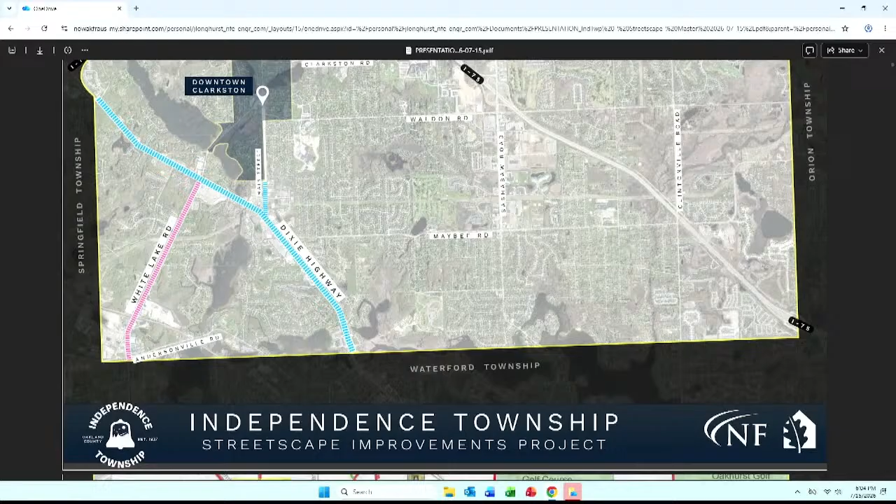So what we noticed is that in these focal points and corridors we're really looking at, White Lake, Dixie Highway, and Main Street, there are existing portions of concrete, some asphalt, but mostly concrete sidewalk that qualify today as safety paths. They're 8 feet wide, concrete from edge to edge, with clearance on either side. Where the areas are thick with this dashed blue and dashed pink, those areas do not have a safety path, whether there's no sidewalk at all, or there may be a 6 foot or 5 foot sidewalk that just doesn't qualify anymore as being safe for multiple users going both ways.

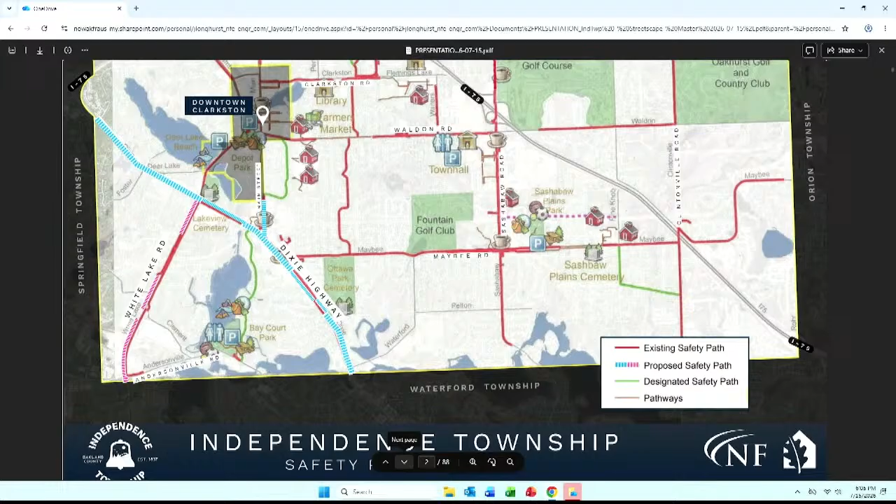We are from Nowak and Fraus. Chris is from Carlisle and Wortman Associates, and we're teaming together as an engineering, landscape architecture, and planning team to assist with this project.

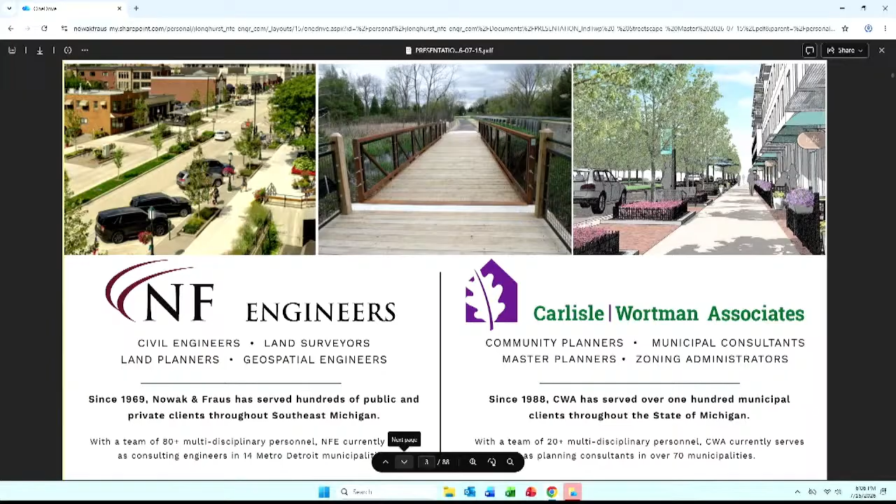Tonight we'll be presenting some strategies and standards for streetscape design and safety paths for pedestrian safety. We'll discuss each of the corridors separately, highlight some safety concerns we see today, and identify opportunities and constraints. Hopefully with feedback from everyone, we can set forward some future planning to push this into the next phase.

I'll let Chris talk about some streetscape design standards, but there are 4 elements we're looking at: hardscape, lighting, furnishing, and landscaping.

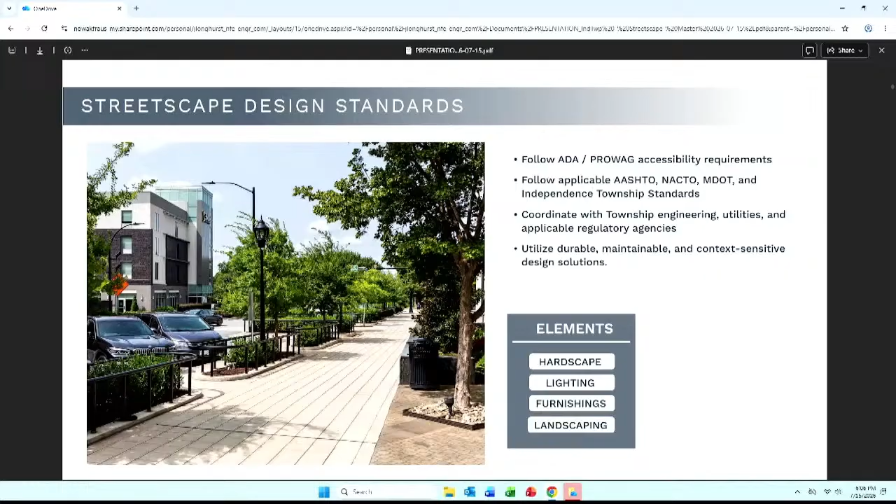One of the goals we have with this entire project is to really tie the corridor together. It's one thing to have a safety path, but it's another thing to have it become an amenity that defines the appearance and appeal of the corridor, and provides recreation and resting opportunities, encouraging people to get out and bike and walk more.

So we looked at those 4 elements, as Mark just said. I'm not going to go through these things in detail, I just want to give you a quick overview of what we're thinking about.

When you think about pavement, having a consistent width, texture, and appearance of the walk is going to be really critical. When we did the pocket park design, brushed concrete was the form that rose to the top, but there are a lot of other options too.

When you think about those crosswalks and how you might use that to differentiate the district from elsewhere in the township, there are a lot of options. One I've gotten kind of excited about recently is stamped asphalt with thermoplastic coating over the top. It gives the appearance of pavers without all the maintenance of pavers.

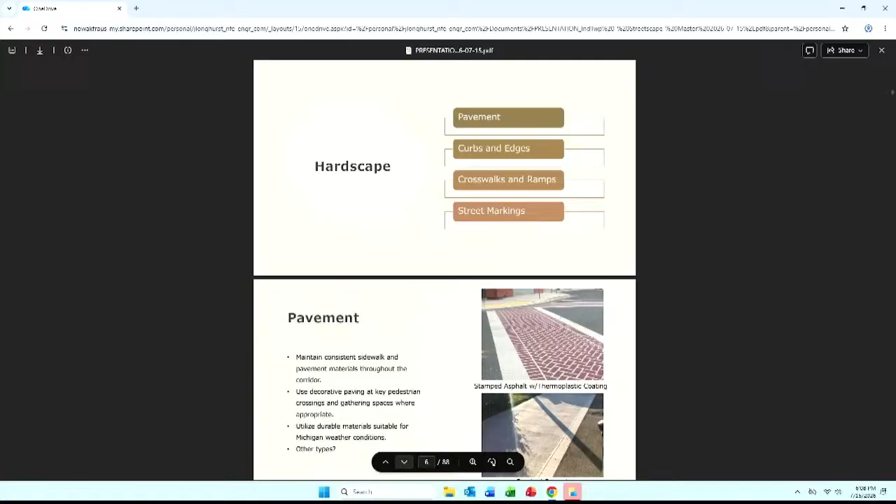As you've probably seen on the highway right now, the existing pavers are kind of lifting up in a lot of spots. This, theoretically at least, solves that problem. So the real point is to make sure we use durable materials that are consistent with Michigan weather.

Similarly, curbs and edges - how do you define what you want between the safety path itself and the side of the road? There are stretches of the highway where you've got grass right now and it's working beautifully, but there are other spots where it's going to get narrower and that grass may struggle. So do we want to figure out something different for that area?

Some places have ground cover in place, like creeping thyme, that might work. We're showing grasses and perennials. I think that would be in a very limited capacity where you've got adequate room between the path and the road, so you're not having any vision issues. There are a lot of options with that.

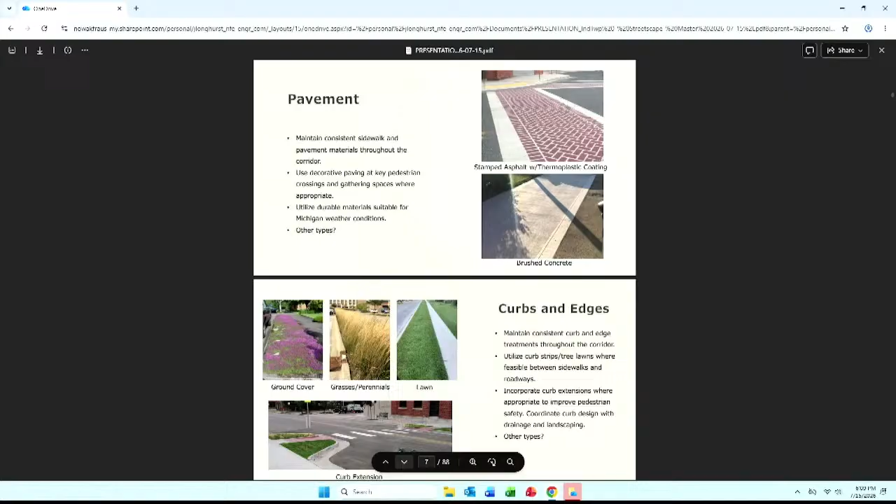One of the other things shown here is a curb extension. So on certain roads where you want to limit the distance that pedestrians and cyclists have to cross, that might be an option we can consider.

Crosswalks and ramps - you're going to hear a lot about ADA compliance from Nowak and Fraus, but high visibility crosswalk markings I think is going to be really critical.

Right now, all up and down the highway, where there are crosswalks they're few and far between, and it's 2 single white lines. Whereas if you had what they call zebra stripes - there are a number of different names, but that's the one I've latched on to - that's a high visibility marking that makes it evident somebody might be crossing there, pay attention. It tends to slow drivers down, makes it a lot safer for everybody involved.

As we think about mid-block crossings, right now you've got 2 stretches of road that go for over a mile with no crossings at all. So what happens? The cars just start flying - I'm sure we've all experienced that. It's already marked as a 55-mile-an-hour road, but if you had some kind of crossing in the middle with appropriate lighting and safety markings, that would slow things down a bit more, make the corridor more pleasant, and make it safer for everybody involved.

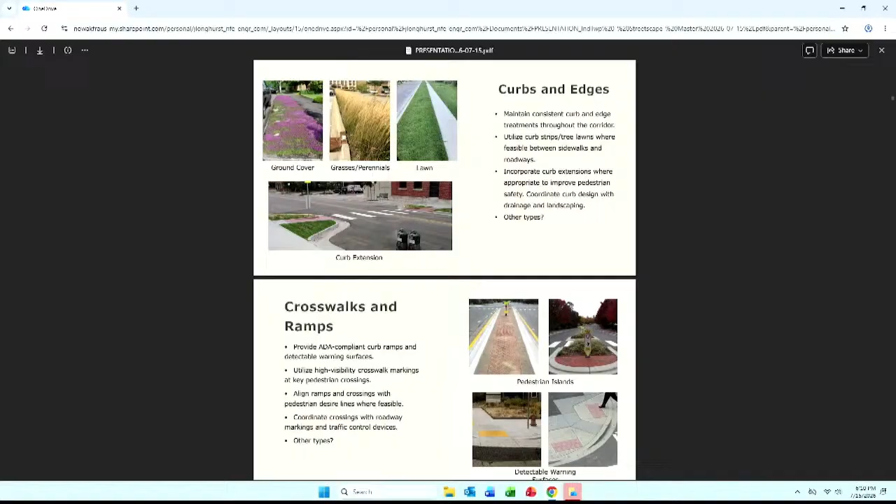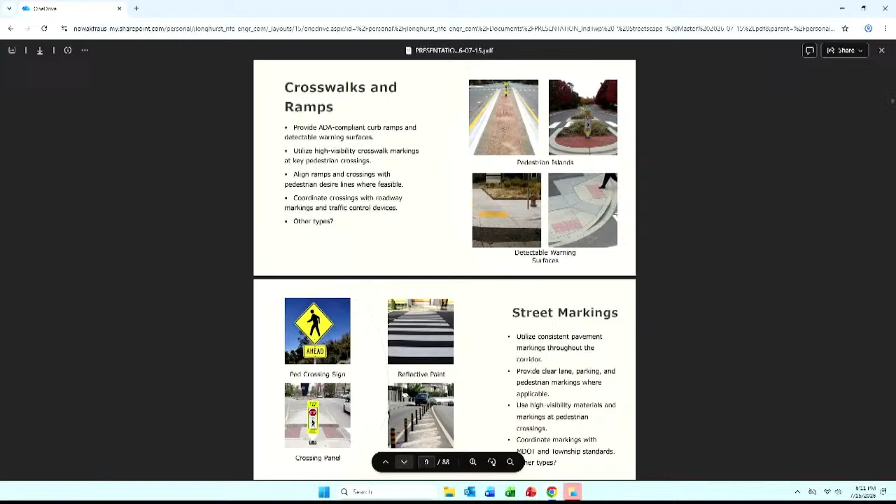I already touched a little bit on street markings. There might be opportunities for bollards, although I think that's going to be a pretty rare occasion. Using crossing panels may be an opportunity too. Certainly pedestrian crossing signs are going to be a big deal, especially if we get into putting in mid-block crossings.

So what Carla has been focusing on so far is the idea of respites. By respites, we're looking at maybe not a full-on pocket park like we're proposing for Gateway Park, but just a little area where you might have a bench, some shade, somewhere to sit and relax for a minute as you're walking along the corridor. It doesn't have to be elaborate, but if you've got room and can make something a little bit more special, that may be an opportunity too. We'll talk some more about some different options for that.

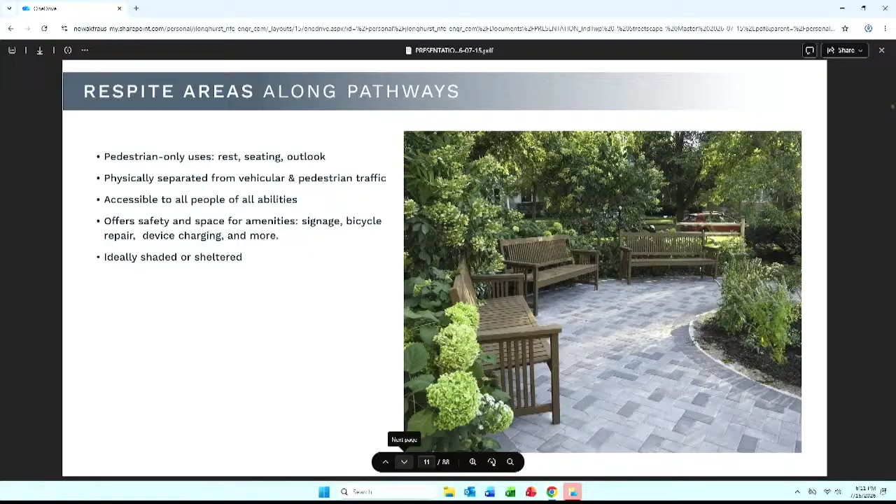So this is Clarkston Dix Plaza Park. I'm sure you're all familiar with it. It's a really good example of what a larger respite space might look like. It's as simple as having a few benches, some nice landscaping, an interesting walkway, and it really sets off the front of the building behind it, becoming a nice amenity. Now with this one, unfortunately there's only one crosswalk leading to it, so there may be an opportunity to improve that pedestrian flow too.

I think I'm going to turn shared use pathways over to Mark. Sure, I know some of you were here for our shared use pathway presentation a few months ago, but it's a good time to incorporate this into the entire streetscape design. There's already a really nice network of 8-foot wide pathways through the township. This slide explains what they're for: they're multi-use, accessible and available to everybody, whether they're on wheels or not, whether they have mobility issues or not. They also provide connectivity between homes and recreation areas, and are mobility avenues for people to get from businesses to schools to parks, all of the above.

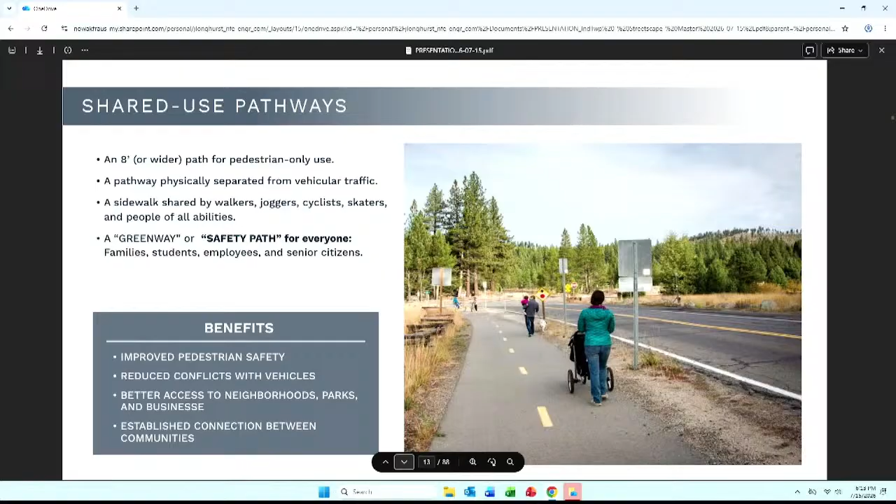These are some examples in the township of recent projects.

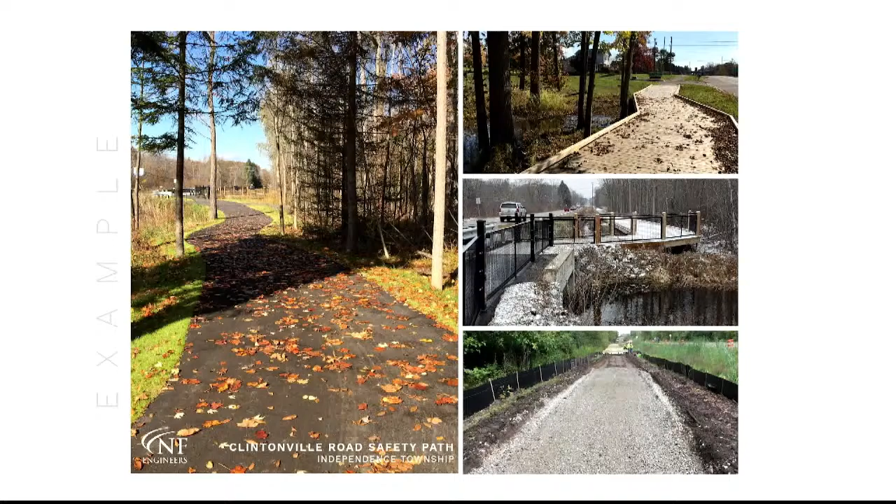You got it. I also think we do need to look to the future more so than existing ones. I see a lot of these put into place to cover areas like crosswalks, and they're totally abused - they don't mean anything to these drivers. Dixie Highway is a very fast-paced, moving, no-room-for-adjustment type of area, and when they're explaining how they're qualifying and what they're used for, I think we as a board need to look at futuristic ideas more so than what's currently existing.

So many of these you see on Telegraph already, in Pontiac between Huron Road and Square Lake Road - they've used those crosswalks, and more people get in trouble there than they help. They don't slow down the traffic. That's exactly what we're gonna run into on Dixie Highway. They're used in so many places, people have tried them, trial and error, and I just don't see it being realistic for our use.

We had a subcommittee meeting - it was me, Sam, and Gus - and we talked about maybe the need for adding one crosswalk, because there's no crosswalk between, say, Andersonville. If anywhere, we'd probably put one at the bottom of the hill, close to Gus's liquor store. I guess there's apartments over there, so people.

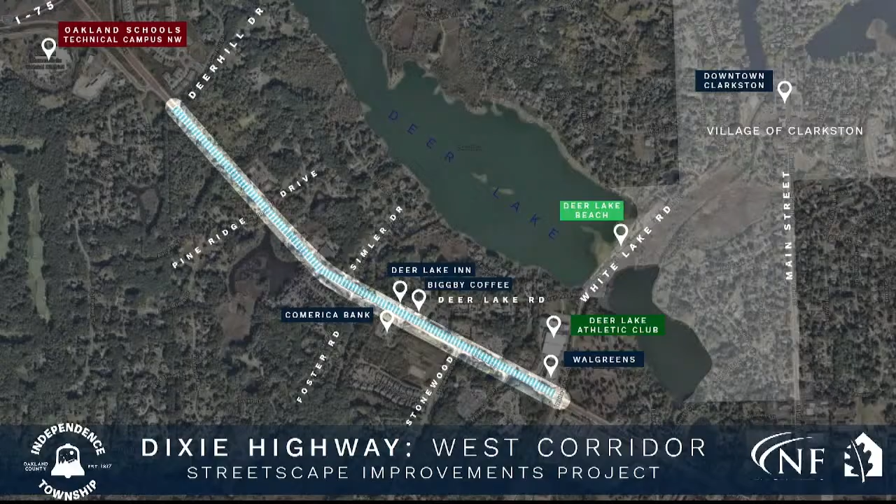Here's a couple of landmarks for those who frequent the area or don't. We've got Oakland Schools Technical Campus at the northwest end, Walgreens at the White Lake intersection, the Deer Lake Athletic Club, which leads to White Lake Road and into downtown Clarkston. We'll go through these relatively quickly.

So how do we connect to that? How do we work with it? Those are questions we're thinking of. We have safety concerns along the shoulders - this whole stretch of Dixie Highway has large widths of sidewalk, but they weren't really intended to be sidewalk. They're raised shoulders for maybe emergency use. People are walking on them though, and it's a 55-mile-per-hour road.

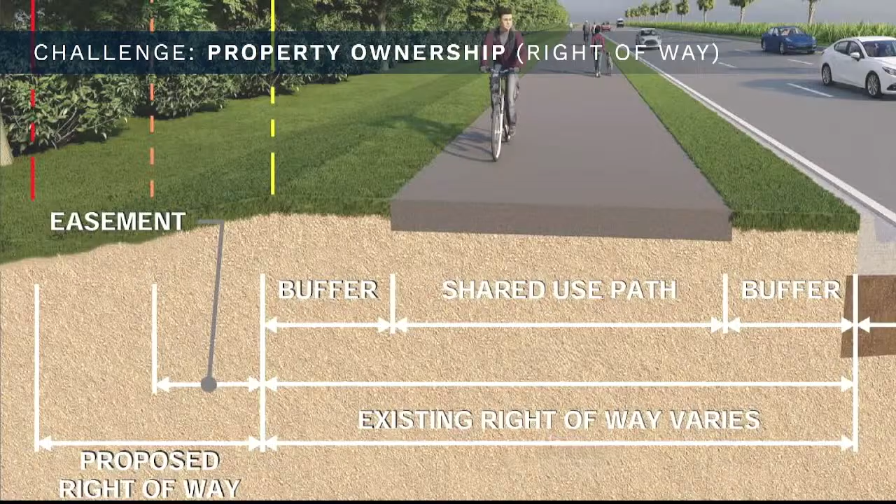These don't qualify as safety paths. What would you have to do to those to get them to qualify as a safety path? We'll get into that as we go. We need an 8-foot-wide pathway, whether it's asphalt, wood, concrete - even crushed stone would qualify.

But we need a buffer space as well. Usually, in our case, we're looking at 2 feet on either side, so that someone riding on the edge with a bike with handles has clearance from utility poles, trees, branches, brush, anything that could possibly be in the way, including railings on a boardwalk. The boardwalks are typically a little bit wider to accommodate movement and people passing by at maybe a relatively greater speed than walking.

We also need to look at easements between this 12-foot minimum width of an area. Do we provide an easement so that there's ample room for the city or the township to work in that area if it's needed?

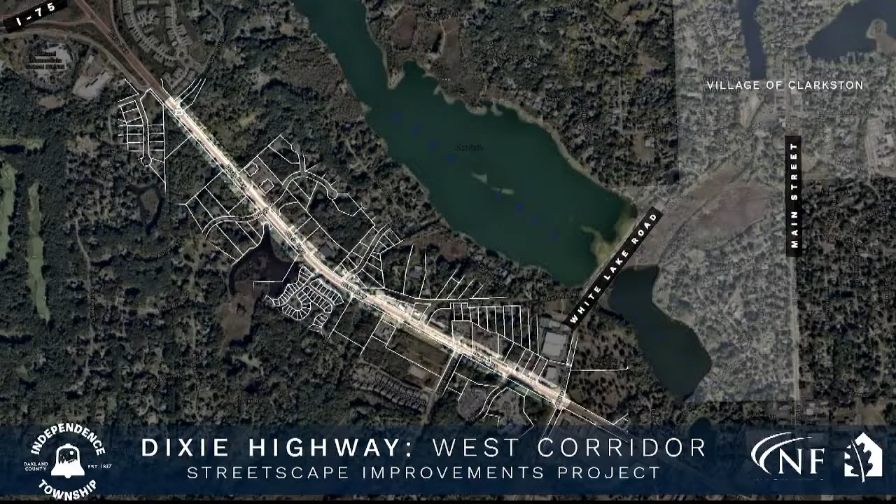Looking at the bottom left, the proposed right-of-way sometimes interferes with all of these things, so it varies. You'll see that here, especially in this stretch. The white lines are property lines, and a lot of them are running straight through the middle of the highway. So they're probably pretty old, deeded a long time ago.

And so it's a 120-foot width of right-of-way through the whole stretch, but in some areas it's about 66 feet. So to put a safety path along the northern edge of Dixie Highway here, we would need to adjust or acquire easements or propose easements, which would all come at a cost.

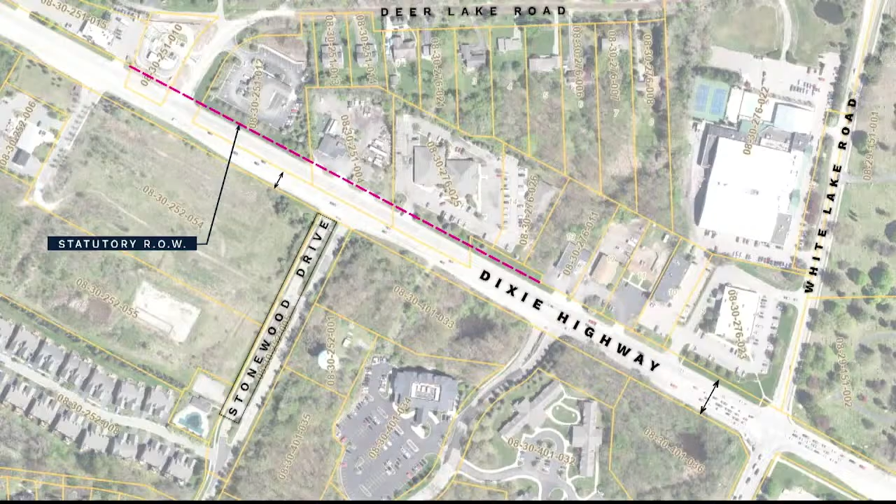If you get an easement for a property, do you require the property owner to address the trees, or is it something we would address as the DDA? Because if you go back, take this stretch from Stonewood to White Lake, that stretch of very heavily wooded area that you need to acquire, is that on the DDA to then deal with the trees and trim that down? Do you guys have any comment on that?

That's a function of the construction of the pathway. So you're just buying the easement and then we deal with it, right? We're not requiring them to do anything? Homeowners would not be responsible for anything maintenance-wise within the width of the easement.

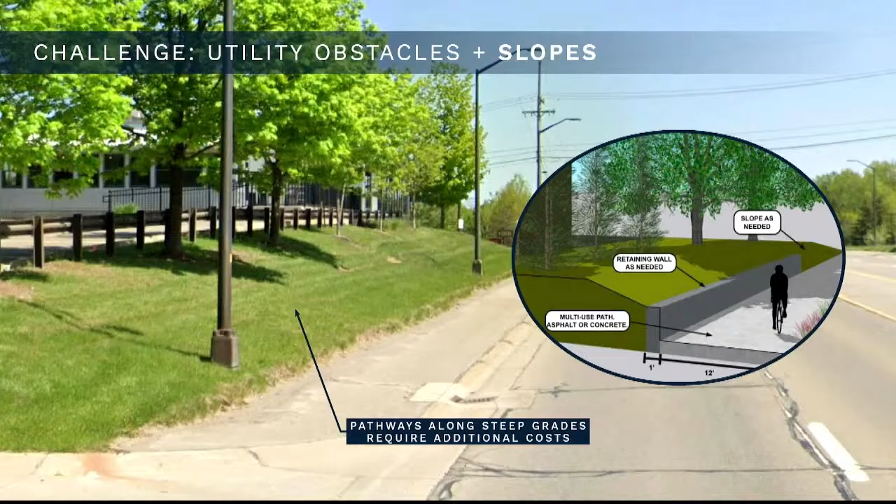There's lots of obstacles, whether it's landform itself, utility poles, lighting poles, even street signs are in the way. And of course, the existing pavement poses something that needs to be worked around or with. In this case, this is right outside of Cruz's Deer Lake Inn. We'd likely need to propose a retaining wall if a safety path were desired on this side.

Either that, or it's moved just 2 feet back from the curb, and all the lighting poles are also moved. And further down the road, all the utility poles would need to be moved as well, which is pretty exorbitant cost for something like a pathway.

Then we have other issues that are more environmental in nature, like a large wetland on the south side, just across the street from this. There's a condominium development just northeast of it, I believe. We have to think about what could be done there, but typically a boardwalk would be the best. We could scoot it just a few feet from the curb again, but what does it accomplish? What does it provide?

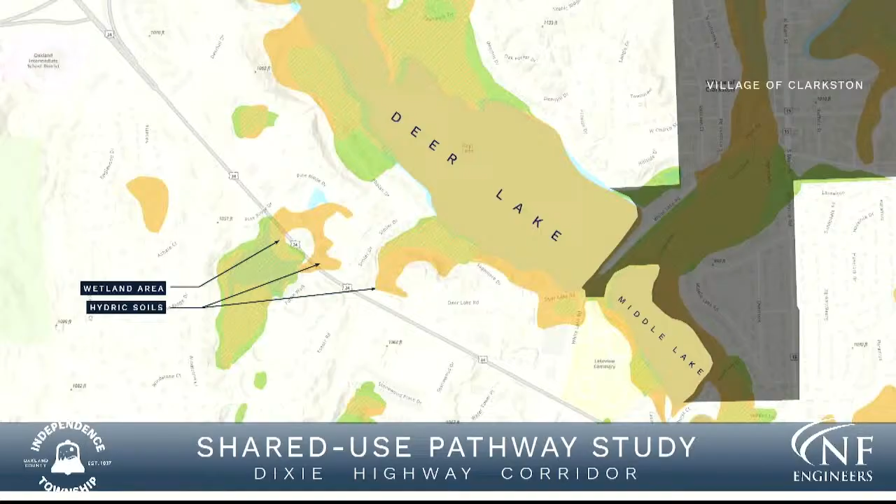So we're looking at hydric soils here in orange, and the green striped areas are actual wetlands. There's not a whole lot around here, but there are some, and even building a pathway on historically wet soils could pose an issue down the road.

Now we're going to move over to the Main Street and eastern corridor of Dixie Highway, which is much more commercial in nature. There's multiple gas stations, multiple landscape supply stores, Kroger, Starbucks, McDonald's, more fast food than that, restaurants, a car dealership, and several strip malls.

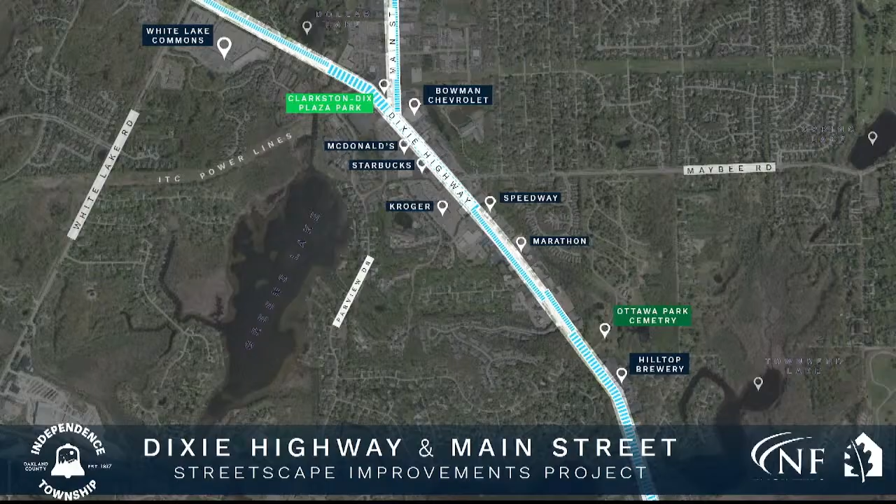In comparison, the environmental issues are a little bit less here. This is the floodplain of Greens Lake and Dollar Lake, shown here in blue and orange. But most of that's already been handled by a boardwalk removal a few years ago.

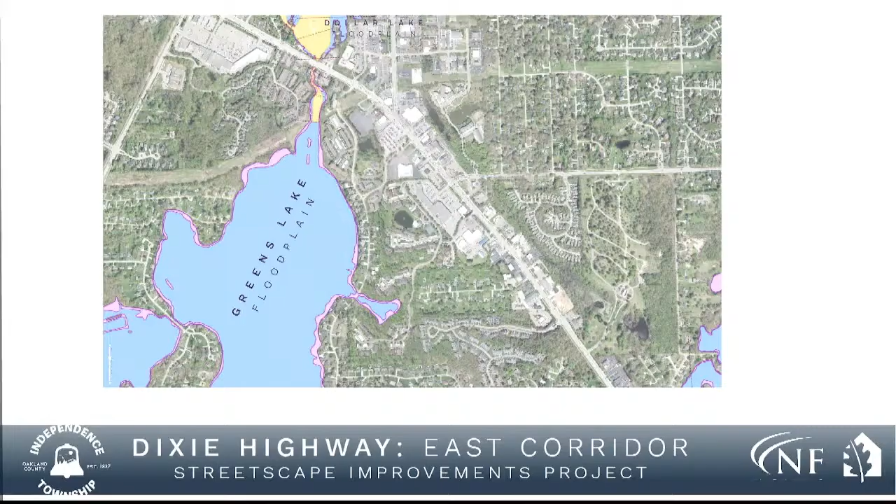And these roads already do have safety paths. Here's an example of some of them on the south side of Dixie. When you look at the north side, it's all pavement against the shoulder. It's 9 feet wide, a pretty reasonable width. It's just, again, right against where people are driving and turning.

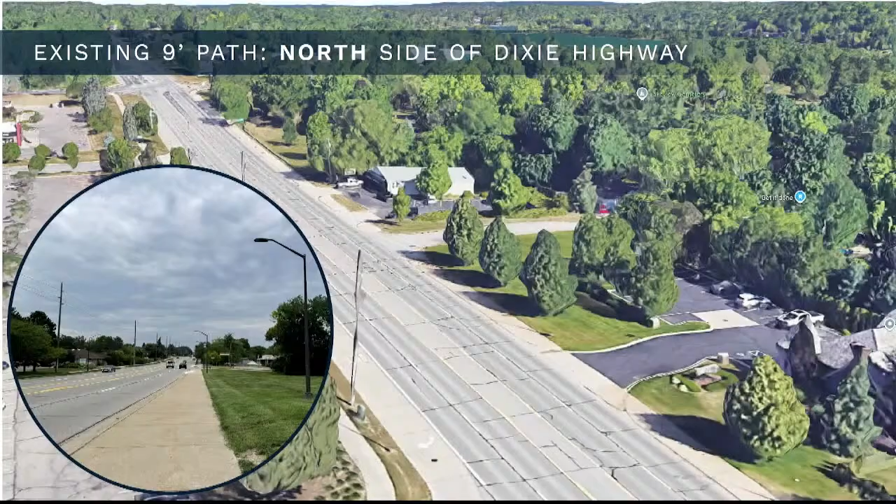Here we're highlighting some concerns at Maybee Road. All of the crosswalk striping is faded. The pavement's in decent shape, but it's not apparent to someone driving through that there may be any crosswalks at all.

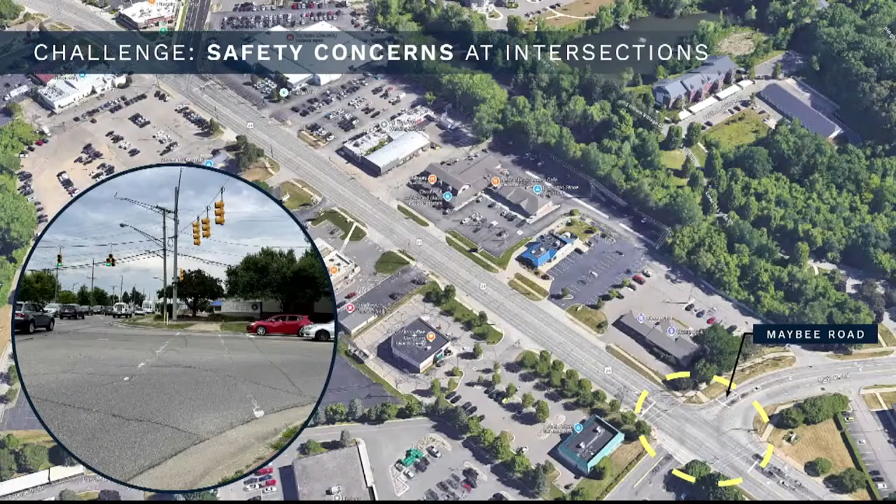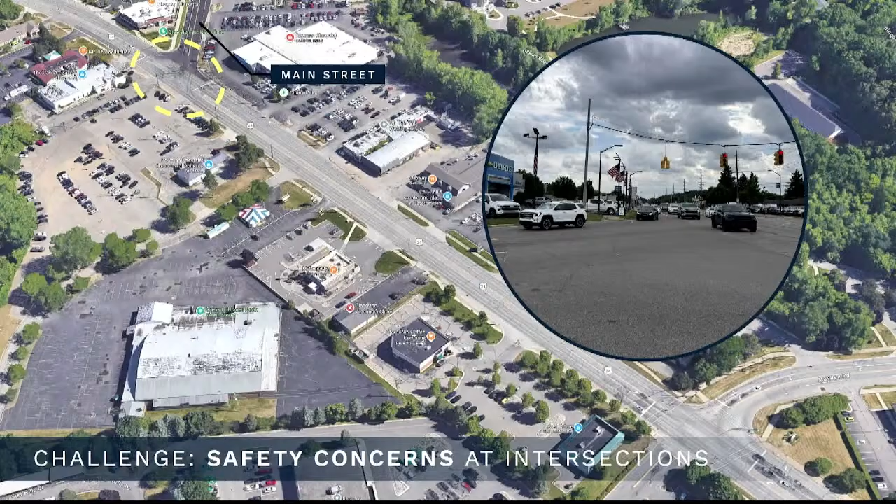Again, at Main Street, which has been newly paved, there is a crosswalk, or several crosswalks, but it seems like a challenging area in that cars are making wide sweeping turns to get from Main Street to Dixie and from Dixie to Main Street. There's a lot to look out for, maybe a lot of visual clutter as well. So this would probably be a focal point to look at, especially as a kind of gateway to downtown Clarkston.

Here's the crosswalk at Maybee and Dixie Highway. Again, fading away a little bit. Maybe a different color of pavement or different treatment to how that crosswalk looks would provide a little bit more of a signal that there is in fact a crossing here.

I think we need to do uniform crosswalks up and down like that. The two lines fade, which we just saw, and it's not that visible.

When we were at the subcommittee meeting, I think Sam brought it up, that at Bowman Chevrolet, there's a crosswalk on the side with the restaurants like Crispelli's, but there isn't one on the Bowman side, and that's where they have a dealership across, so their porters are going across there without a crosswalk, and it's just dangerous, it's waiting for an accident to happen. So adding one there is definitely a must, on the right side of that yellow circle.

Okay, right across Dixie. Yep. Are you thinking maybe we should do something different with that intersection entirely?

It's on the table. I don't think that's achievable. Maybe that's not... That's MDOT's intersection, that'd be a major problem.

Are they in charge of painting the stripes too at MDOT, or are we? MDOT would be, that would be a maintenance item. Right, as a part of that, isn't it on them? Yes. So in the meantime, we should have them doing that, since it's faded? Make clarification.

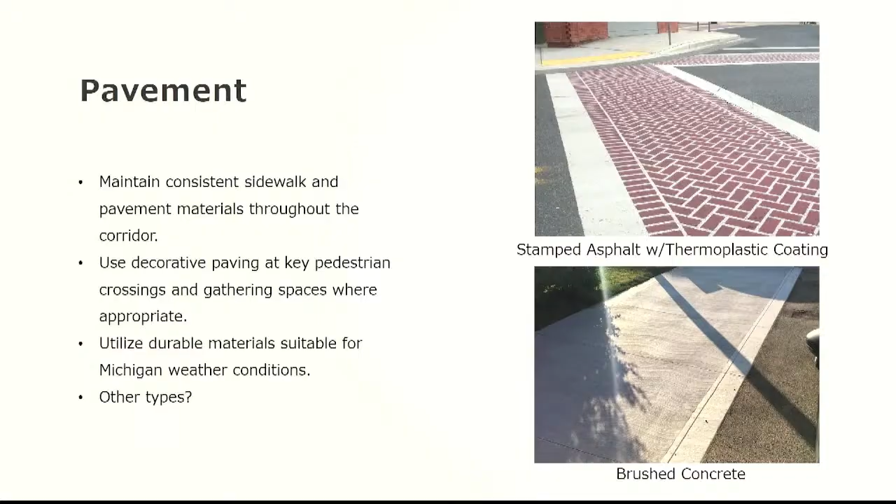Is there a community that has that stamped asphalt anywhere? Like it's been put in and we've seen it seasonal and it's lasted? So that's when you're driving on the freeway and you see the I-94, I-75 interchange stamped on the concrete there, that's the stuff. I haven't seen it with that exact...

Brick pattern laid down in the area. I did talk to one of the vendors of it, and he said they're using it in a couple different cities. I'd have to contact him again and find out if he can get some examples.

I'd be interested to know what their winters are like and how much salt gets put on them, and can it stand the test of time? Yeah, it looks pretty, but if it is the same as everything else, Michigan winters are hard. And that was my first question to him.

Again, he pointed to the freeways, and I know that all around Chicago they've got those things everywhere. Seen 'em in Canada, Chicago too, weather's a little bit milder in Canada, but not a lot. And again, we're seeing it on the freeways here, so at least in that respect it's worked pretty well. I don't know how it would hold up as a crosswalk feature, but there's nothing that really indicates it should be any less durable than tens of thousands of cars going across it daily on a freeway.

Cheaper to repair. Yeah, much.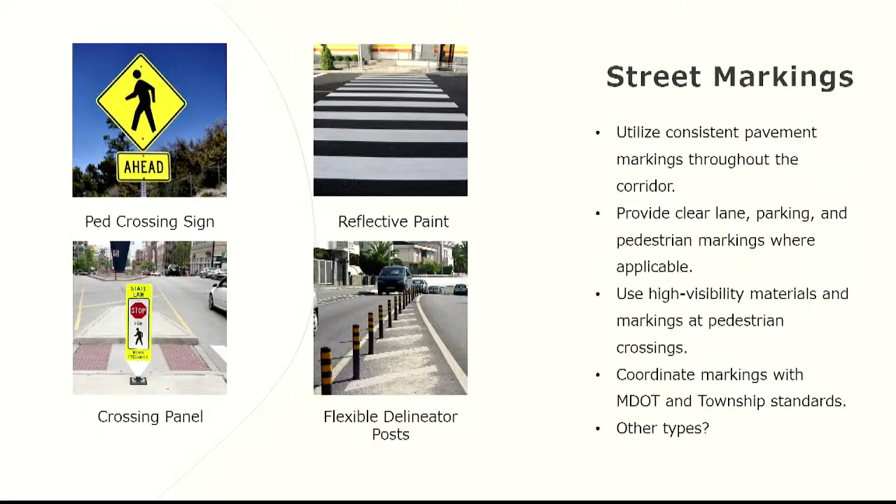So again, here's reflective paint. The two stripes that you've got now is that same reflective paint, and obviously it wears down over time. But if you've got a wide stripe, the width of these two tables here, that's clearly visible, that's gonna start to address your concerns about people going, well, is there something here? And we're gonna touch a little bit more.

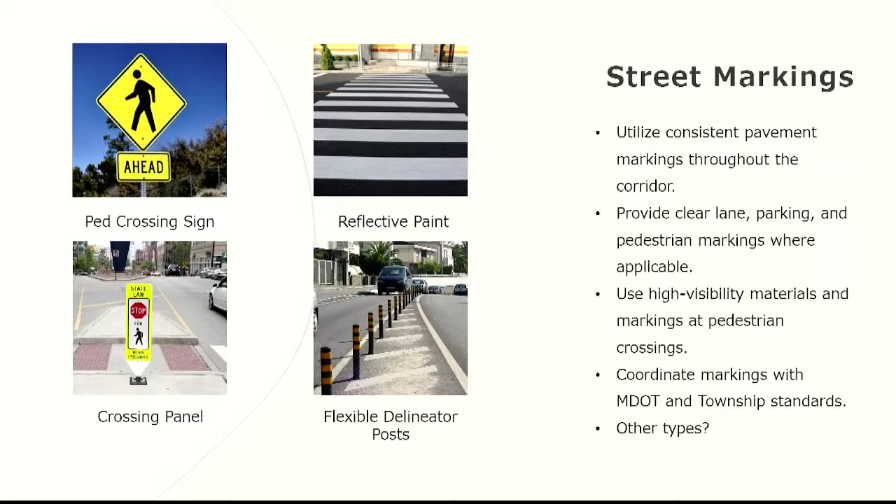Let's, I'm sorry, you keep on. I didn't mean to- No, it's absolutely fine. And I don't mean to be the guy, that negative guy, because I hate that, actually, because I just want to, I sit there and think about downtown Clarkston.

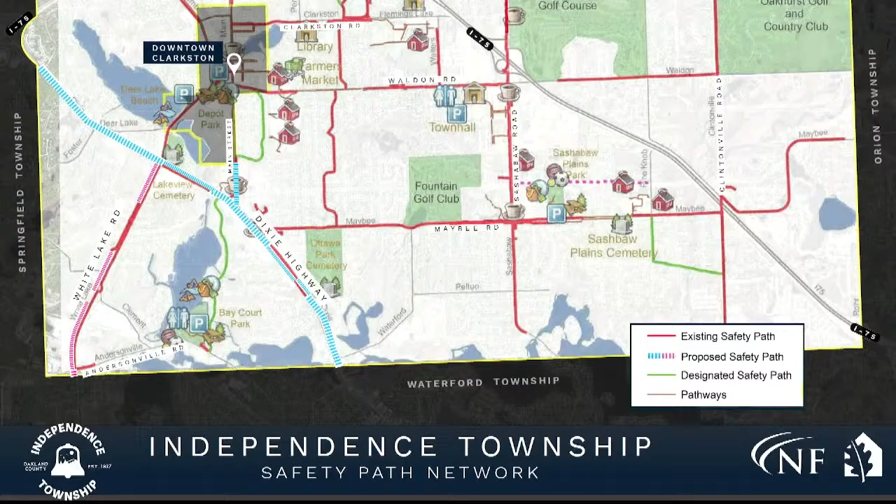Cars are only supposed to be doing 25 through there, and they don't stop at the crosswalk with the cones, with people holding flags. So I'm kind of with it that I don't think painting anything on the road's gonna do anything. The brick asphalt thing, aesthetically, it's pretty, but I think after the first three times the car runs over it, they're not gonna pay attention to it again. So it's kind of interesting.

A professor of mine from grad school is retiring this year, and she had coined this phrase called 'cues for care.' The idea behind it is that if you show something intentional that catches somebody's attention visually, it makes them stop momentarily, psychologically, and it at least makes them think, hey, there is something happening here, I should pay attention. So having a different crosswalk stripe, I agree, once you get used to it, it just kind of goes in the back of your mind. But if it's different enough and there's enough cues that come through over and over again in the corridor, it does have an impact.

And if you slow down one person, that necessarily slows down the next people behind them. So there is definitely an impact by putting these types of traffic calming measures in place. Is it gonna stop somebody? If somebody wants to be doing 70 miles an hour down Dixie, they're gonna do it if they can. But if it slows down two or three or four people who in turn slow down the people behind them, that's when you start to see the impact. And again, it takes time, but people do start to respect it eventually. So I understand your point, and I agree with you to a degree, but I do think these things aren't just window dressing. They do have an impact long-term.

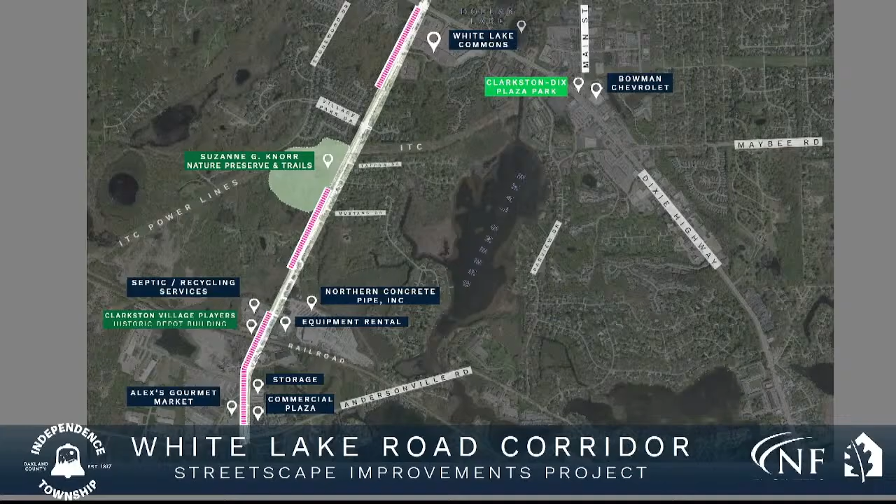The clearance might be an issue on some of these, where technically you're supposed to have 2 feet of clearance on the side, and there's a wall right up to the pavement. But I'd say the average person would feel like their arm could cross over the top of the wall, or a handlebar could cross over the top, and it might actually be safe enough. But it would have to be analyzed to ensure that it's wide enough.

Some of the pavement is in pretty good shape, some is a little bit rougher, but overall it's nice.

Here's, I believe this is not Stonewood Drive, but it's the Stonewood Village Park development. And there's a nice area for crossing here. If there were an intention to bring people from one side of White Lake to the other, doing so might not require any further safety paths north of Village Park to Dixie Highway.

Is that the bus stop? Yeah, they bring the kids across the street to go up, some middle school kids in the morning.

My question is, is this stretch of the road governed by the state, or is this township or county? It's a county road, the road commission. So if I heard the rules correctly earlier, this is something we could potentially impact without getting MDOT involved? So this would be a great example.

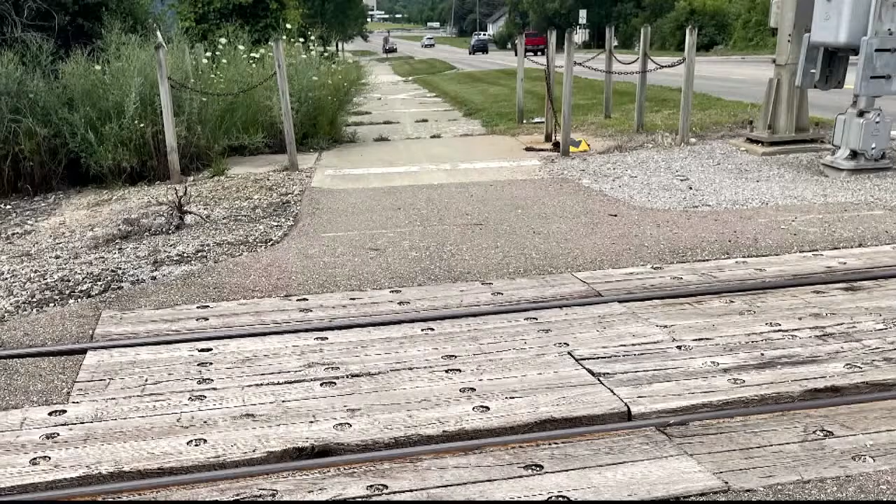We also have a railroad crossing on this stretch of road, which is altogether not terrible, but might be inaccessible for some people who are riding a bike or using a wheelchair. It would have to be assessed to make sure it can handle them safely.

And then, as with other portions of the safety path, it ends. Across the road is actually still Independence Township, but there's nowhere to go accessibly. So anyone crossing here has no crosswalk and no ramp to get to the other side.

Where does the township part end, right there? About 300 yards past that statue at the cemetery. So it would kind of be a sidewalk going to nowhere, because unless Waterford ties into it, it doesn't really make sense to put a sidewalk there. It could also link from the corner across White Lake Road.

We're looking at Andersonville Road from left to right, across Andersonville. Could it go to the other corner, the kitty corner? Correct. Good bench spot.

This is a 6-foot pathway going to the cemetery. It would actually end about the entrance. We did look, the cemetery is gated on this corner all the way to the entrance further south. Independence is just about to that entrance, right? I think so. If the sidewalk would go to that, then they go in. Possibly.

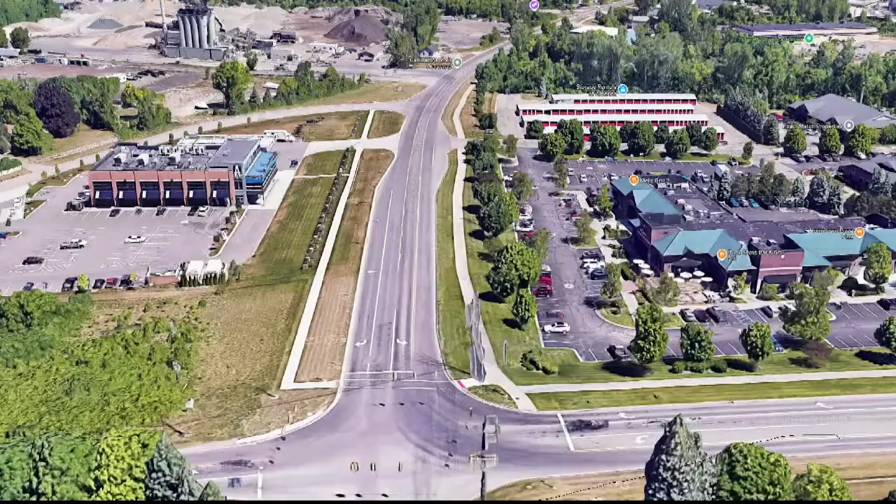At this point, we were opening it up to questions, and I'm happy we got questions sporadically along the way. It does help keep the presentation going. To you and residents of the community, where are there unsafe areas that make you feel uncomfortable? Where are there visibility concerns where you can't see what's happening? Are there any specific areas?

I guess I'll pass out a couple of these maps. Coming from 59 towards that Village Park area, there's this little slope thing, and where he pointed out across the street, that's where the kids walk across to the bus stop. If you're coming that direction from 59, where all those trucks are coming from 59 to 75, they have no clue. I think it would be great to have a crosswalk there. I also don't know that truck drivers are really going to notice a blinking light when they're in a hurry to get to 75. So I don't know how you fix that without spending $700,000 to put one of those things across the road.

But while tying into the sidewalk across the street, I don't know that Parks and Stonewood's gonna give you the easement there, on property that's part of that nature preserve. I just don't know. To continue your sidewalk, how do you deal with things like that?

That's the fun of it. You start getting into discussions about easements, seeing if there's any appetite for having a pedestrian bike trail. With a lot of preserves, they're fine with pedestrian traffic, but they don't want bike traffic because it tends to rut up the ground and causes ecological damage. So those are the discussions.

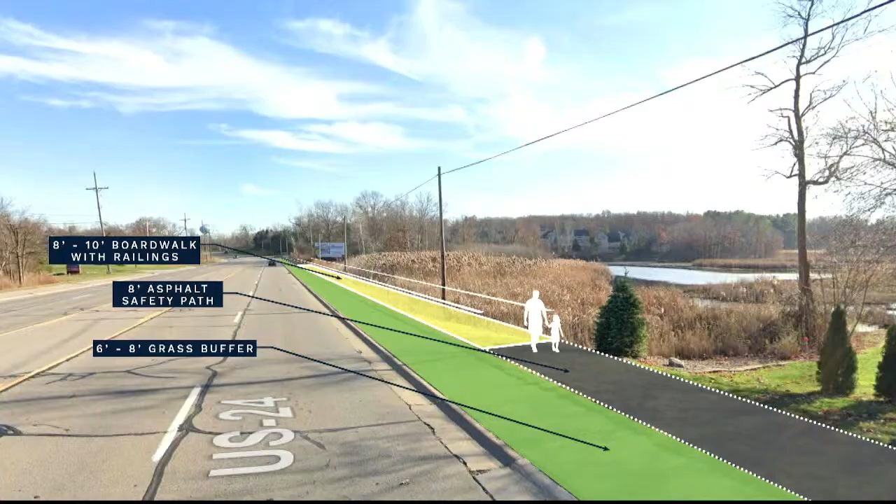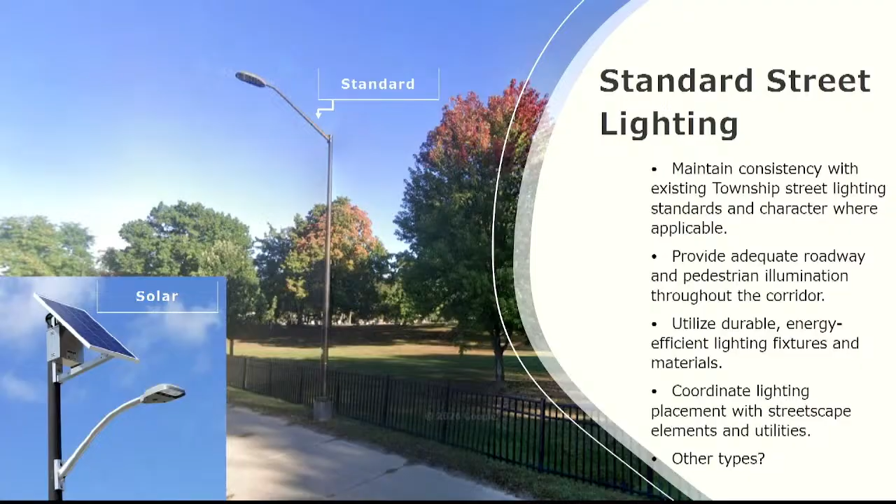And then what do these include? I think most of the design standards, that's something we're working through. We've had some good feedback already. If you've got some ideas on what you'd like to see in place, I'd certainly welcome it.

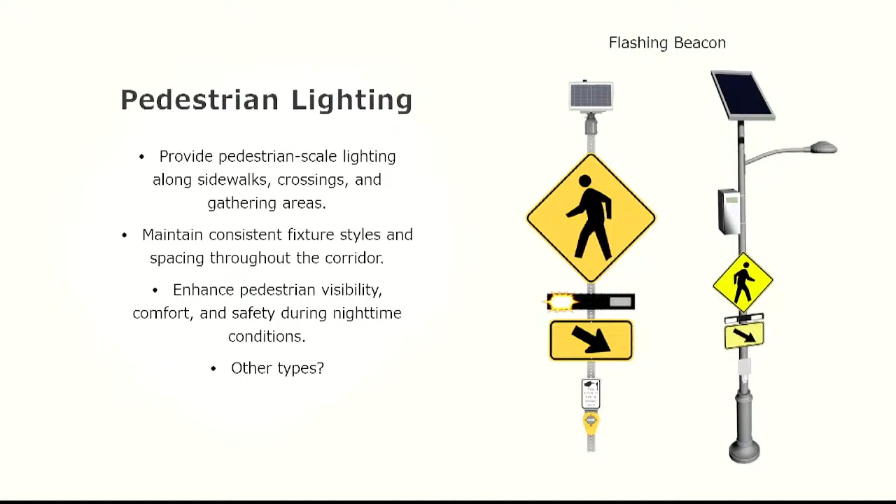This is what I was talking about with the hawk lights, where they've got a standalone pole. I know it's just still graphic, but those lights are bright and you can't miss them. So that would be, if you did a mid-block crossing, that's the type of thing you want in place, because you're not going to have enough pedestrian traffic at first to warrant maybe a full stoplight, but having that in place really makes a big difference. There are also versions where they actually have a traffic light that comes on only when pedestrian activated. Those are a little less common, but it's an option.

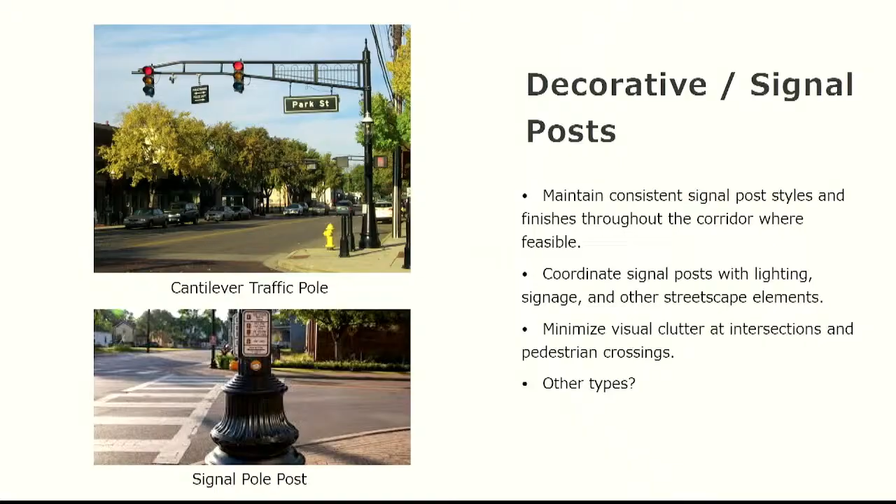We've talked about the light posts and how that might look. Again, does this all carry through as opposed to what's already there? Let's go to the next slide here. I'm going through real fast.

We talked a little bit with the group about bike facilities. Probably doesn't make sense for most of these spots, because the idea is you're getting through, you're not stopping as a destination. But at a Kroger, does it make sense to have something like that in place? Do you want a standard format, or do you want it to be artistic like these are?

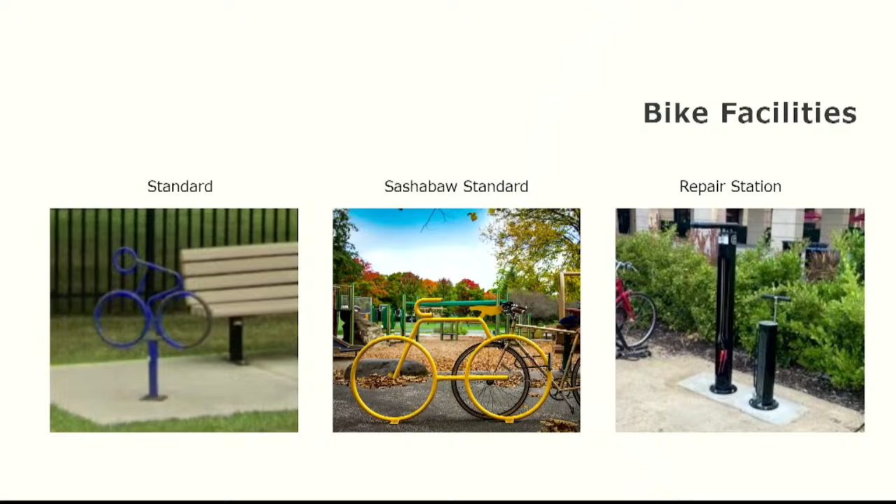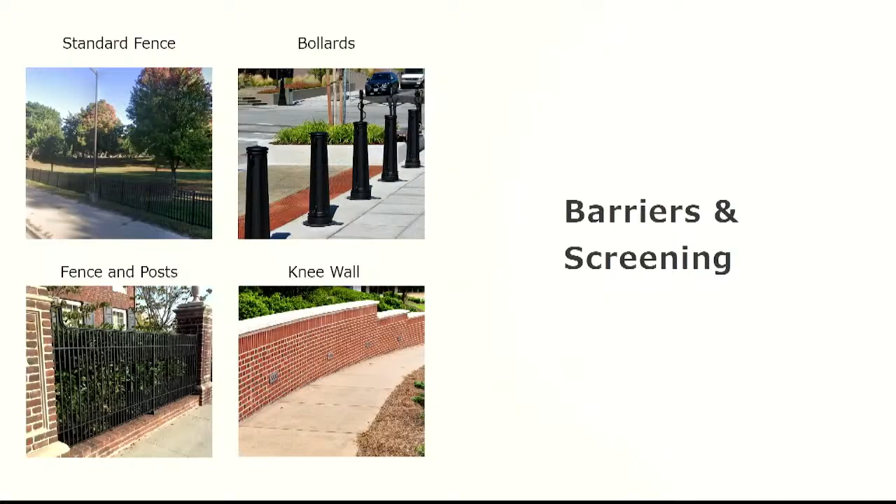Barriers and screenings, so knee walls, what have you, again more with the bollards, similar to the Sashabaw corridor where you've got that style. Other elements, lots of opportunities, artwork, et cetera.

I'm just going through quickly to get to the last point. I'm going to skip past landscaping for now, other than know that we've pulled together a plant palette using native plants to help with reducing the need for irrigation, but provide better ecological benefits. There's opportunities for stormwater systems.

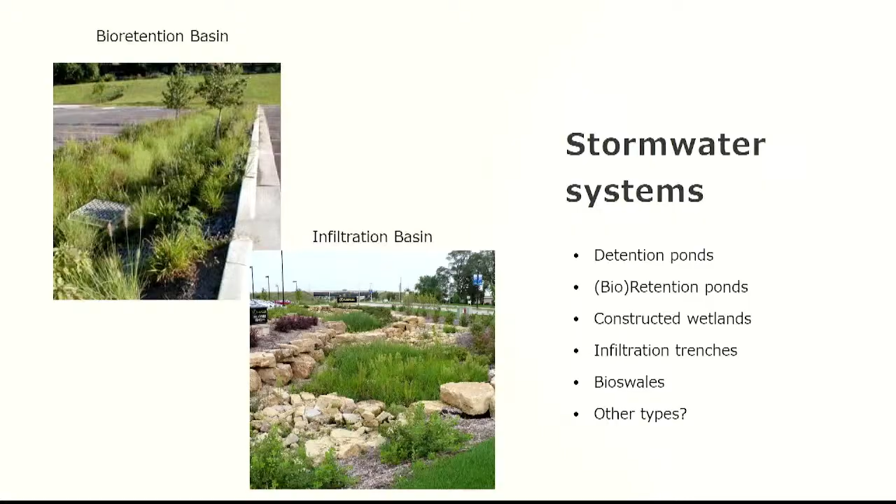The green corridors, how do we preserve what you've got there? There are some spots that have some actual decent tree canopy in place.

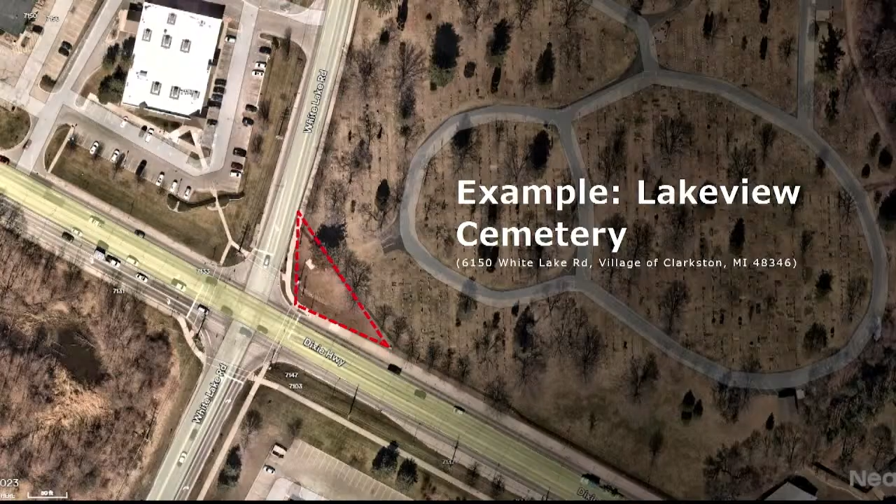And then these are just 3 examples that Keely St. Andrew from my office and I put together, showing what could happen at that intersection, where you take the safety path, have it go off on an angle down below into the valley, have some seating down there. We've got a little bit of a stormwater basin right at the front that connects into the existing stormwater facilities. And these are just different iterations of what that might look like.

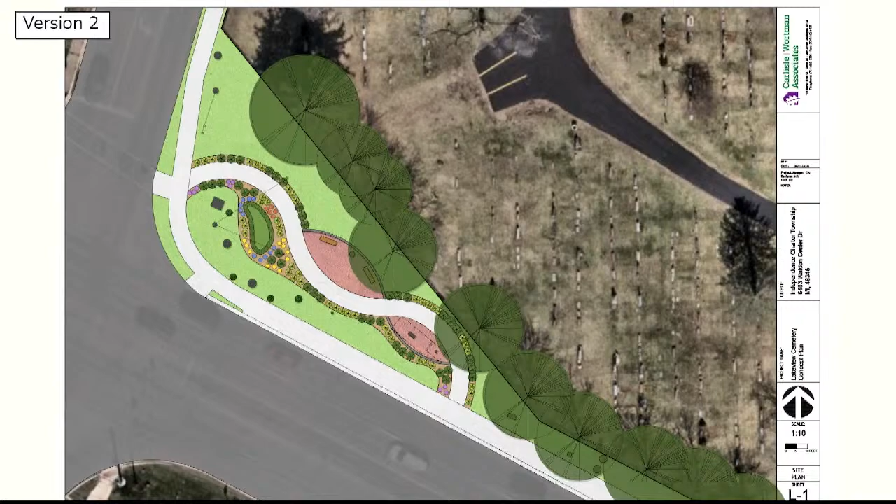And this is something that could then carry over to different spots along the corridor. I just need to know where you think there would be some good opportunities. It doesn't need to be anything this elaborate. It could be just a simple bench, maybe a knee wall and a little bit of landscaping, but something to dress the corridor up a little more, make it more inviting for people walking and biking. I think that's it.

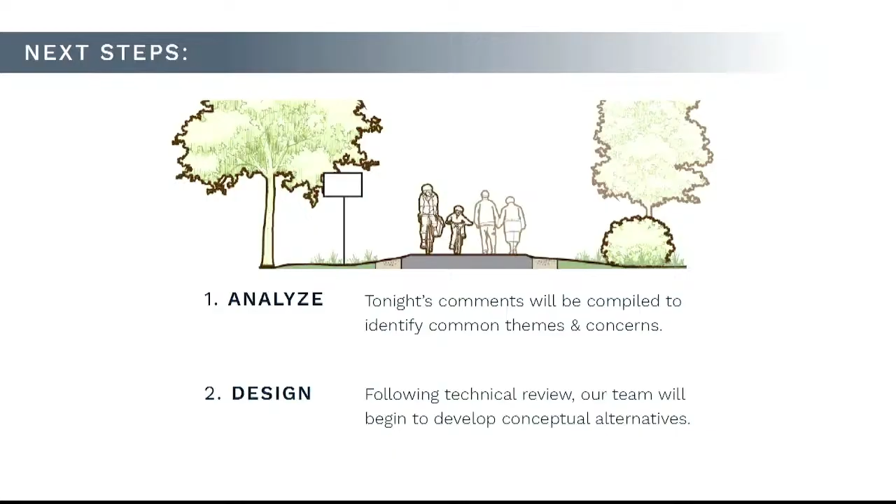That's it, there we go. We made it through. We did it. Thank you. Good job, guys. Thank you. Thank you very much. I'm glad you brought those last designs up, because that's what I was thinking about from our subcommittee meeting. Those are great ideas. So thank you, gentlemen, appreciate it. Thank you, guys. Thank you.

So we're going to move on. Item G, public comment. Nobody's here. I don't believe anybody's online.

Financial matters, verbal report by Mr. Carlisle.

You're currently running with a $406,000 plus fund balance, primarily because you haven't spent very much money this year yet. Obviously on consulting work, the Gateway project hasn't moved forward much - it is moving forward, but you haven't had any expenses associated with the actual construction yet. And this is before summer tax collection, so you'll be receiving additional revenues. So from a financial standpoint, you're well within budget and in good shape.

Do you want me to just go right into other current activities? Yeah, so item I, reports, resolutions, recommendations.

Current activity: the Gateway project, as you are aware, they were delayed trying to get the stormwater management system in. But Jason Longhurst from Noack and Faust has indicated they had a meeting with the contractor. They're gonna be back on site in the middle of August because they went off this project and went to some other projects, and will be back under construction by mid-August.